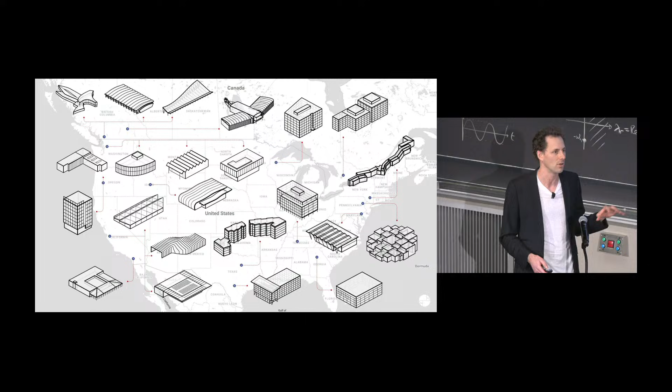Our company, we're both engineers and builders, and we work across North America and Asia on all types of structures, from long span arenas to office buildings to institutional. We cover the range of structure types. And perhaps what's most unique about our company is the number of different professions that are represented inside our organization. MIT, I learned, has such a multidisciplinary focus here, and it was inspiring. And in our company, we have almost 200 structural engineers, computational designers, carpenters, master carpenters, installers, project managers, people who can model, and software engineers.

And so today I want to talk about design and construction and why have they separated, and why we strongly believe we must bring them back together. It's not that they're entirely separated, but in many of the buildings that we build in the built environment, there is a bit of a separation which is formed.

And so going back to perhaps the first Allen lecture, this is Jörg Schlaich, and he wrote, "Care and detail, thinking and tinkering no longer pay off because labor cost outweighs material cost. So that soulless, clumsy structures are cheaper than those lovingly conceived." And isn't that true? But it's perhaps beyond just the increased cost of labor. I believe it goes to the interfaces that we have between us as designers and us as builders.

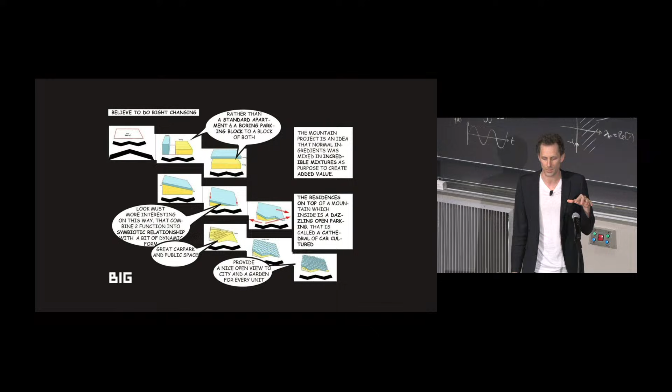And right from the start of my career, I saw how interfaces shape what we design. From Bjarke Ingels' comic book sketches, which perhaps changed even building owners' perception of why their buildings exist, to the rise of Grasshopper and parametric design, and seeing that in my early years in London, how that shaped how we could design different shaped buildings.

And as a structural engineer, of course, the interface of the software, wrestling against analysis, convergence and instabilities, and spending more time, I remember as a graduate engineer, perhaps myopically focused on the interface, the software, than on the structure I was designing.

And then seeing my father working across these structures and connecting engineers and carpenters to create incredible structures. So today I want to talk about some of these interfaces.

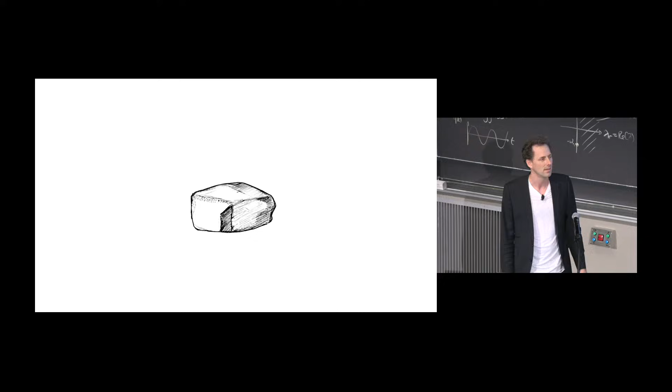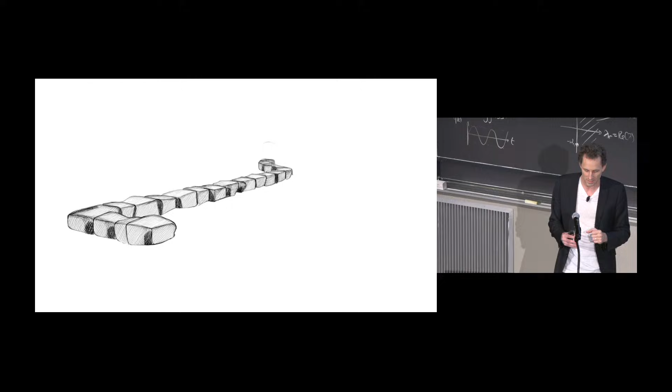So if we go back 6,000 years ago to Mesopotamia, we shaped raw earth with our hands. We created these mud bricks dried in the sun, and we built these tholoi, these monoliths, these houses that were a direct kind of human material interface. There's zero barrier between design and construction.

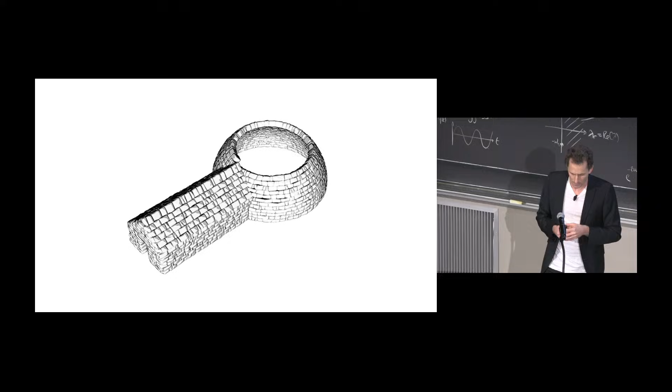And as we built these, we learned from our designs and from our construction because we lived with the consequences of our design choices. We learned by doing. We had an intimate knowledge of our building materials.

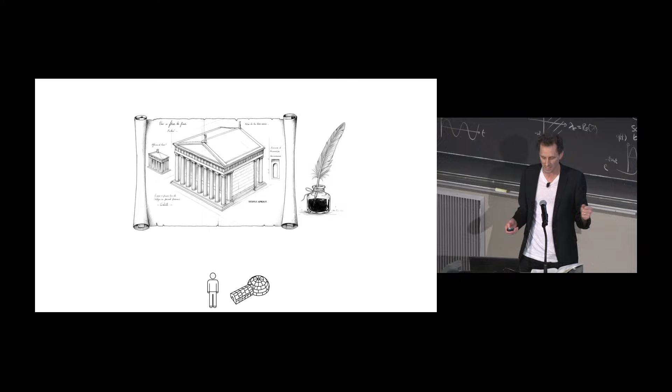The next interface that started to rise was the drawing. 5,000 years ago, we were using reed styluses to etch on clay tablets. And all of a sudden, there was this possibility that the mind conceiving was perhaps different from the mind that was creating. The Greek word architecton, which literally translates chief builder, was responsible for both design and construction. And it wasn't until the Renaissance that we saw more of a separation between the designer and the builder.

Then we had, after this interface of the drawing, this idea of a module. From the earliest cities, we started to establish ways of partitioning space into kind of repeatable geometries, modules that spread across geography and across culture. But these modules weren't just a physical object. So the Roman modular brick or the Greek column, they were, in a lot of ways, a shared understanding, which allowed construction knowledge to spread.

But once these modules were entrenched in our industry, these industry-accepted modules perhaps became more expensive and difficult to move away from. They gave us a structural design language, but in doing so, they shaped what we say.

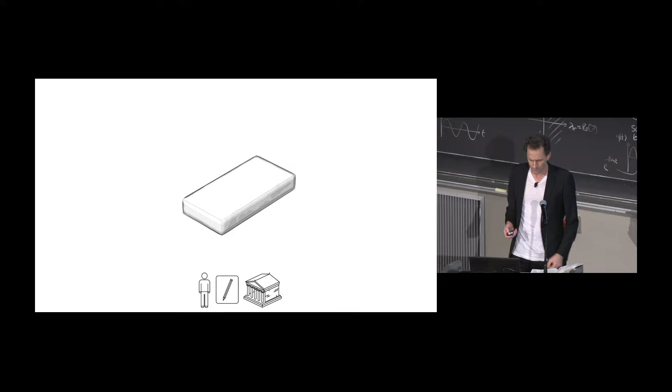The next interface, I believe, between us as structural engineers and our buildings, was really the rise of the calculation. During the Enlightenment, we applied scientific method and mathematics to construction, and now all of a sudden, we could move beyond just guild tradition to predicting material behavior. Our design knowledge became codified into building codes and standards, and this enabled safe construction across more complex structures.

But as these standards developed, they also started to become constraints. As engineers, we began perhaps designing for code compliance more than just for structural efficiency.

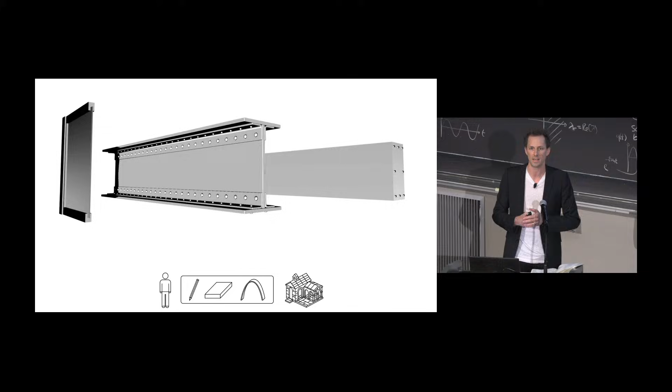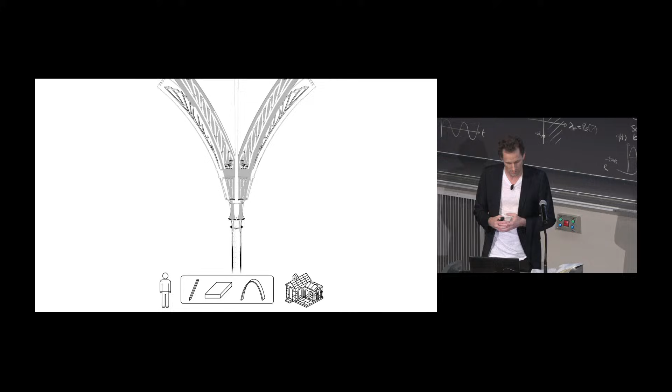The next interface was what I call the catalog. During the Industrial Revolution, there was this plethora of materials that started to hit us as a construction society. Manufacturing comes from the Latin word manufacere, which literally translates made by hand. But that became mass-produced, didn't it? As designers, there's the possibility of being limited not by what we could craft, but by the supply chain.

For some, the catalog became perhaps a boundary of imagination, and sometimes we end up navigating the market more than deeply interrogating materiality.

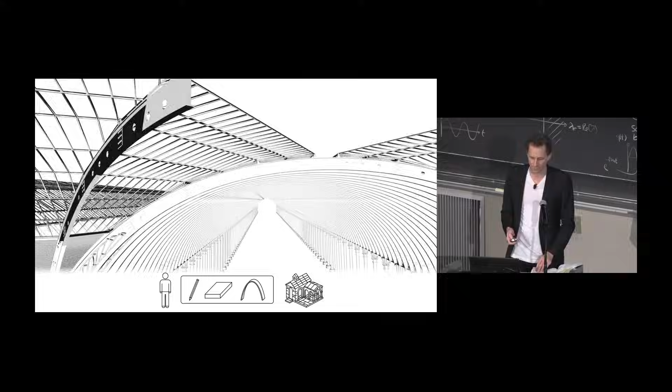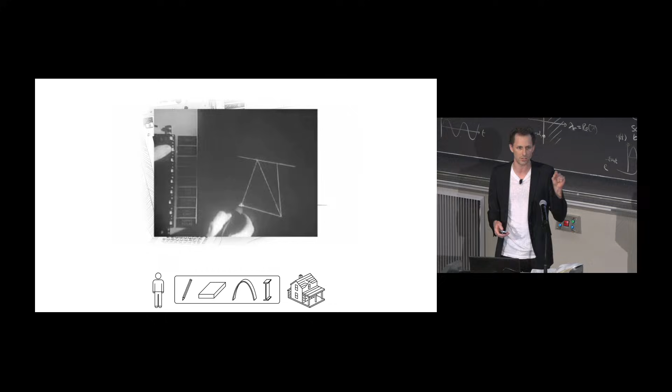The next interface that arose, in 1963 right here at MIT, was the computer. And this is Ivan Sutherland's Sketchpad, 1963, where he created the first CAD software, using a stylus to directly interface with a computer for the first time. And this computer greatly improved what we could do, from a coordination standpoint, complexity, simulation, and it was the first digital interface.

This digital interface is different than an analog interface, as you all know. So the hand-drawn line has got thickness, it's got texture, it's got an inherent ambiguity. It invites a conversation, but a digital line is mathematically precise and perfect and absolute. And perhaps we started to think that because we could model something, we could build it.

I run a sketching class for our engineers, and we put a hunk of CLT down on the table and a sheet of paper, and each person gets a pen and draws the CLT block. And then I put up a Bluebeam sketch of that same CLT block, and it's red lines, right? Every engineer would draw that CLT block in Bluebeam the same. But the sketches we get back are 40 different, highly varying, looking at grain, looking at knots, looking at cracks.

So analog versus digital. And now, of course, we face a new interface, artificial intelligence. And for the first time, our tool is not passive, it talks back.

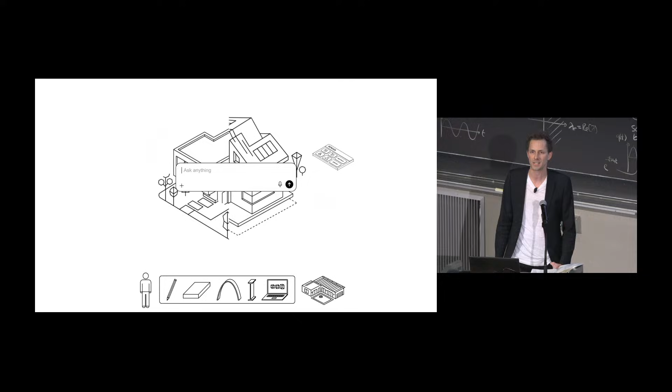We now have this vast knowledge and power at our fingertips. But with this incredible power, I believe, also comes an incredible responsibility. I think the danger is not that the machine will take over our designs, but that we may passively start to accept the optimizations without understanding the first principles that govern them. So I think these AI tools that we build as an industry over the next 10 years will have a huge impact on how future generations think about design.

So these 6 interfaces, from drawing to algorithm, they've enabled these incredible new scale, forms, and complexity in our built environment. And they've also enabled collaboration, this idea that we used to spend 10 to 20 years working on a single building, and we now spend maybe 1 to 2 years working on many buildings at once. And so these interfaces have enabled us to collaborate across disciplines and achieve more complex and more varied geometries and forms.

But we also have constructed this wall between design and construction. I call it the construction contract, right? And we lob change orders and RFIs over that wall. And so us as a practice, we ask, how do we reconnect design and manufacturing and construction? And so today I'm going to talk through a series of projects looking at using timber as a natural material and how we've used that to perhaps challenge or extend some of these interfaces.

Has anyone heard of a peeler core? Raise your hands if you have. A few. So you take a log and you chop it up with a bandsaw, right? And then you take those boards and you agglomerate them into glue laminated timber, cross laminated timber, et cetera. But actually there's another way to process a log, and this is how plywood is made. And so a log goes onto a lathe and it's peeled. And at the center of that log is a peeler core.

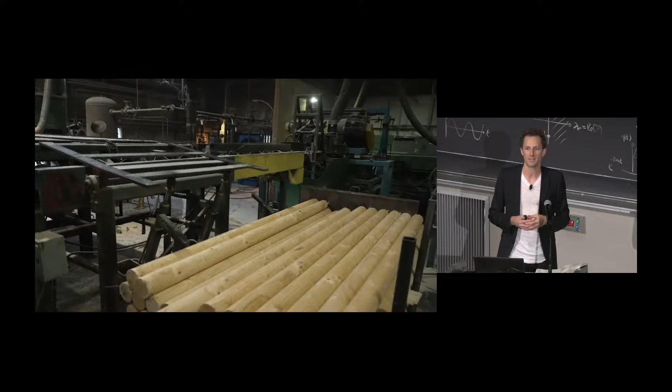And these peeler cores are produced by the billions each year by our industries worldwide. They're juvenile wood, the youngest wood in the tree. They check. They're naturally, in some ways, not very strong. And so one of our earliest projects, led by my father, was a tetrahedral space truss, conceived using these peeler cores as the structural elements.

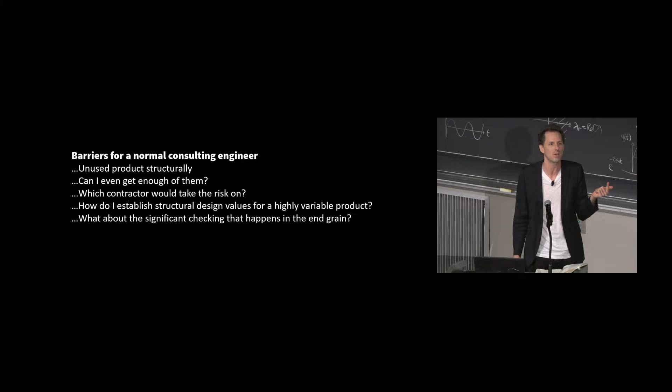And so, as a traditional engineer, we may have barriers to using a product like this. There are no accepted design values. How about this checking and the cracking that occurs? How can I get happy with the structural performance? How am I even going to buy enough of them? And this engineer-builder approach really goes and says, well, I'm going to take the responsibility. I'm going to actually deeply understand this material. I'm going to go test this material and really understand it, and then take responsibility for executing the construction.

So here you see these peeler cores with these custom engineered steel rings which have been inserted into the ends to restrain the checking. And then casting, which allows each of these peeler cores to be connected one to the other. And then these bands, different colors that actually represent different structural capacities. Space frame is a highly redundant structure, and so if there is one defect, well, it doesn't matter because you have redundancy. And so this idea of using a waste material to create a two-way spanning timber space truss.

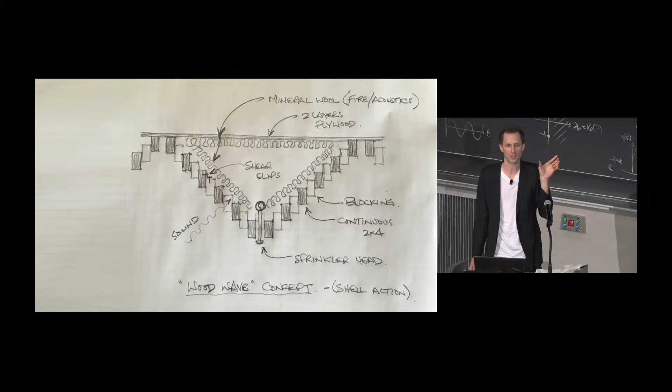The second project I want to tell you about is the speed skating oval for the Olympics in Vancouver in 2010. The humble 2x4 reimagined as a structural composite panel. And so you see these big glulam arches that are spanning about 100 meters across this oval. In between them is a series of these so-called wood wave panels. And this was my dad's first sketch of this, this idea of taking 2x4s, staggering them up and down, and then tying them with a cable at the bottom to basically force arching action through the 2x4s.

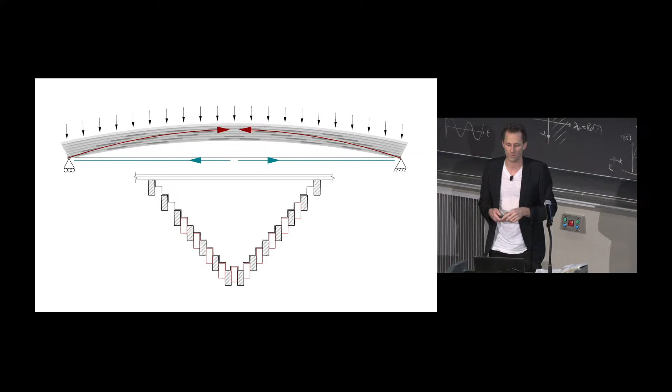So this is a 45-foot clear span. Normally, if you took a 3.5-inch thick mass timber panel, you might be able to clear span 10 or 12 feet. Here, with an effective depth of much deeper, because we're tying this arch, now all of a sudden we can clear span 45 feet, but with only 3.5 inches thick of structural material.

And so back to this connection of the engineer and the builder, here we are in our shop designing equipment and machinery for how to actually manufacture these wood wave panels, how to invent the hydraulic press that would press them into shape, how to prefabricate these strands of lumber that connect and create this arching action up to the plywood shell on top. But then, of course, how to predict the load capacity of a structure so unique. We, of course, had to load test it. So here we are in our shop conducting snap-through buckling tests of these wood wave panels.

And so creating a deep understanding of materiality and how the construction and manufacturing process impacts what we design as engineers. And some pictures of this structure during construction and this pattern of the blocking, which actually created an acoustic absorptive surface, which actually reduced the reverberation time in this giant speed skating oval.

The next project I want to talk to you about is a project in China, and I want to talk about the interface of the computer. This is a series of domes. Every single piece of timber in these 3 domes is unique. They have almost a clamshell radiating pattern. And so the computer really is the only thing that enabled us to handle the 10,000 or so unique pieces in this project. But we also had fabrication constraints.

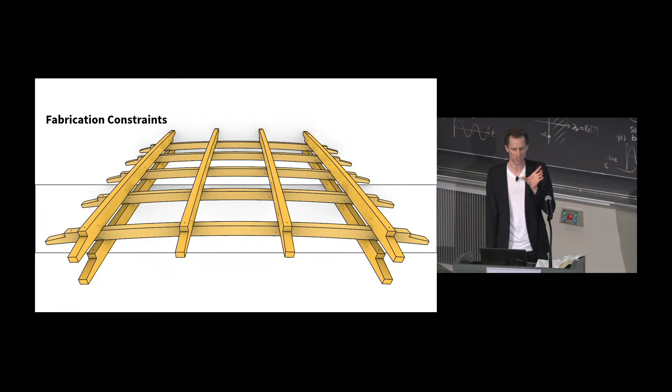And so this glulam was going from Europe to China on rail. And so we had this constraint of the shipping container. But we were also cladding it with glass. And so we had this constraint of doubly curved glass. How big of a glass piece could we get? And how does that influence our structural size?

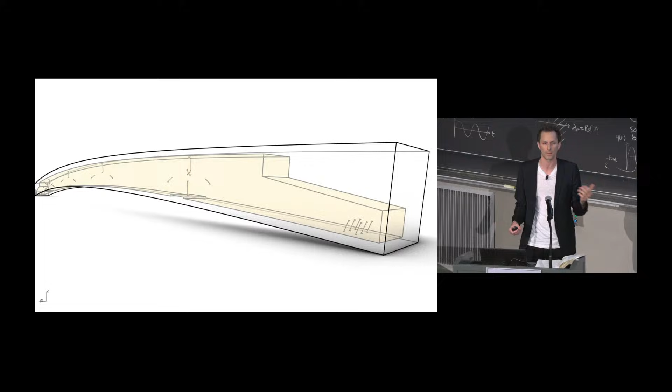And so here's a pragmatic, perhaps, way to create doubly curved glulam. We take a singly curved billet, and we actually mill out this very slight double curve to create doubly curved glulam without being limited to only one of a couple of manufacturers who can do that natively. And so here's these prefabricated panels, which are highly influenced by this shipping container in terms of their size, with joints that are influenced by how we're going to build it and how we're going to assemble the structures together.

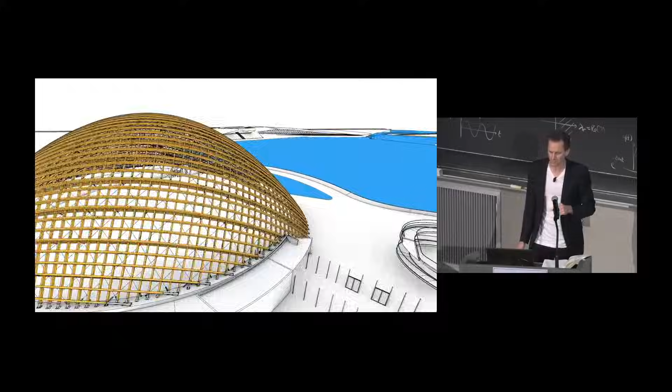These 3 domes are biodomes, so desert dome, aquatic dome, all sorts of different environments inside the domes. And the smallest 2, we were able to create this 2-way grid shell without triangulation from a structural standpoint. And in order to do that, we needed to prove the structural capacity, the torsional capacity of the joint between the 2 directions. And we actually created this joint using only screws. And so this is, again, structural testing, looking at the shear capacity and also the torsion capacity of these connections that we had designed.

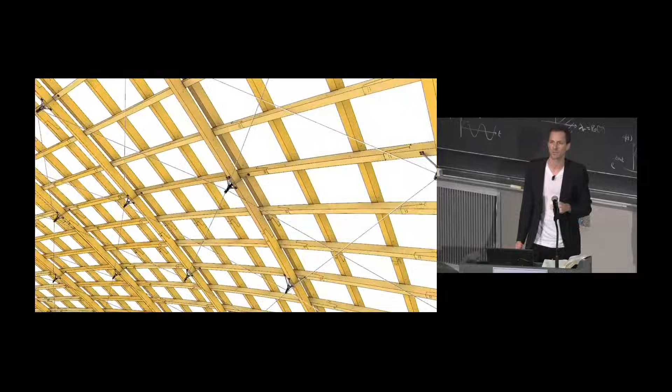But for the largest dome, we had a grid of cables to triangulate the structure. The span was too big. We couldn't restrain this kind of in-plane shear buckling. And so we had to come up with a grid of cables, constantly changing angles that the cables intersect with, and how to connect those cables back to the timber grid shell above.

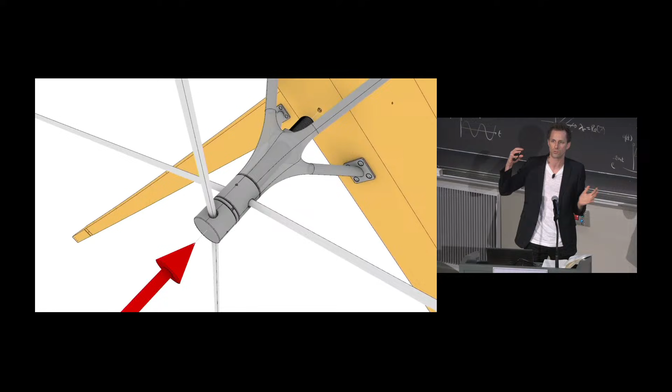And so here's this concept of rotationally decoupled castings, which thread onto a central threaded rod. And that threaded rod not only allows the cables to thread on, but it allows us to actually draw that cable system closer to the grid shell above. And so here you see these stainless steel castings.

And this was one of our first major projects in China. And as we started to talk about how to build this, I was thinking shoring towers. And the local engineer said, no, we're going to scaffold the whole thing. I thought that was bonkers. How can that be the most cost-effective way to build these domes? But as I later learned from the folks at Grimshaw, that's also how the Eden domes were built, fully scaffolded.

And no, this is not bamboo scaffolding. This is metal scaffolding. But construction approaches in China are quite different from what we might be used to here in North America. We had people riding the panels up onto the dome, if you can imagine. But here you start to see these grid shells take shape, and this kind of idea that you could create a non-triangulated grid shell only using screws, so there's no metal plates between these two directions of timber. And so when constructed, this was, I think, one of the largest clear span timber grid shells of its type in the world.

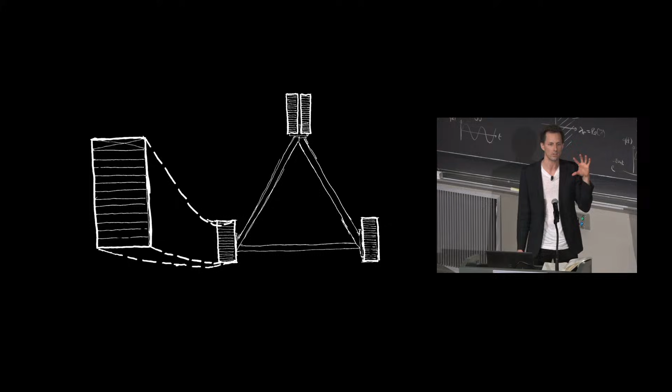So the next project I want to talk through talks a little bit about the interface of the calculation. This is a project where we're using glulam, but we're using it as a hybrid with steel to create a triangular truss. So we have a double top chord and then two glulam bottom chords connected with steel webbing. This is in Tianfu in China, and this is about a 750,000 square foot project. And these vaults clear span up to 400 feet and are up to 150 foot tall. So as tall as a 12-story building at their tallest.

And here, if you think of a vault, of course, compression structure, catenary shapes, as we looked at earlier, are the most efficient way to do it. But timber alone for an arch of this span would be a challenge. And so we're starting to think about hybridizing and creating structural depth again with steel trussing.

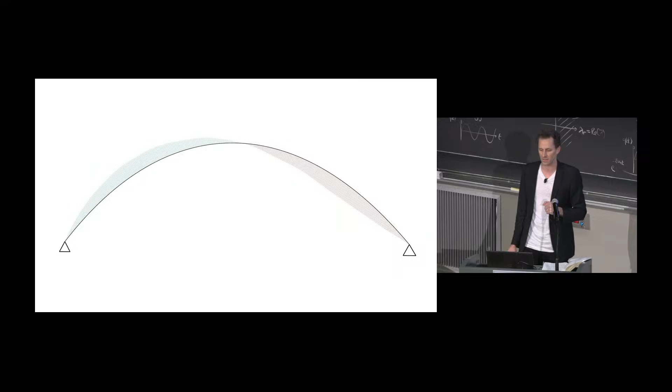And looking at the analysis of a pin-based arch versus a fixed base arch, we start to realize that if you fix the bases, you get a natural kind of hinge point at the mid-span. And that allows us to start shaping that truss from deep at the perimeter to shallower at the center.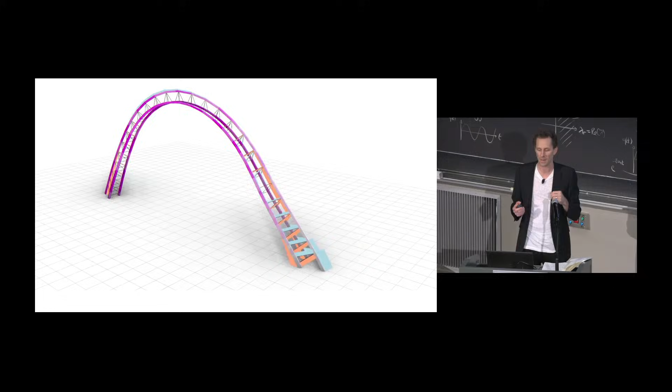But it also informs some of the thinking around how we connect the top and bottom chords, this idea of almost a Vierendeel connection. And so the trussing in this truss doesn't node out, which it should, of course, because the trussing should node out, otherwise you get bending moments and shears in that bottom chord. But here what we're doing is, by not making the steel node out, we've actually created a way of splicing and prefabricating this truss.

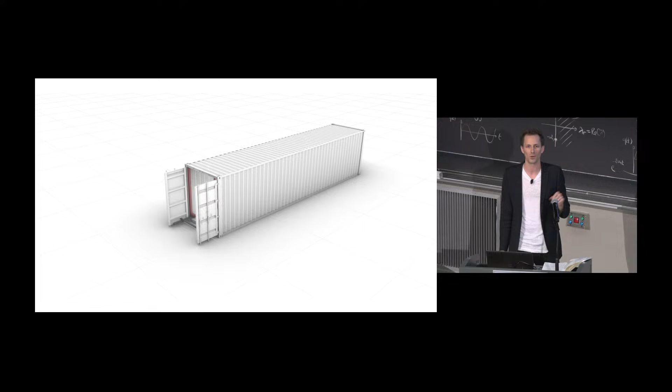This entire project was built during COVID. We were only able to get one person into China. It was on lockdown. And so we had to create almost an instruction set to instruct the local crews how to actually build this structure when we couldn't have the normal crews we would have there to help guide the whole process.

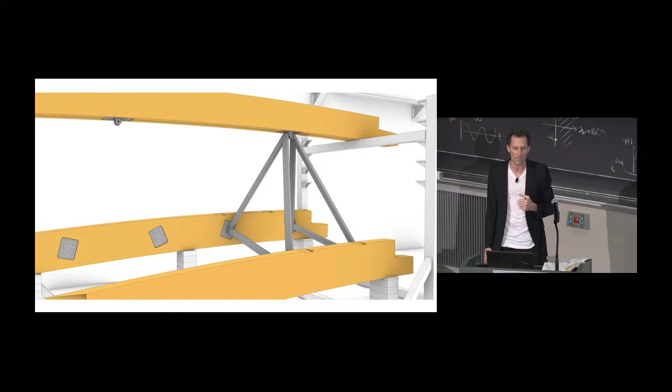And so here you see almost this 3D IKEA set diagram connecting the top and bottom chords into these sub-assemblies, which are done off-site, which then get craned onto the job site and connected into larger lift assemblies. These lift assemblies then get craned up onto shoring towers, so I finally got to use my shoring towers. And we built them over top of steel and concrete structures that were being built underneath the arches at the same time. And so the installation technique actually greatly informed the structural system.

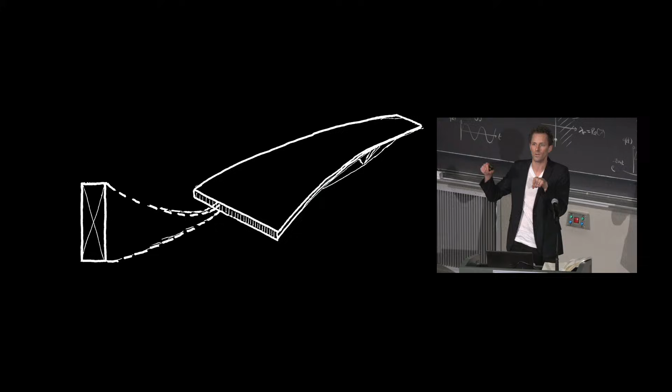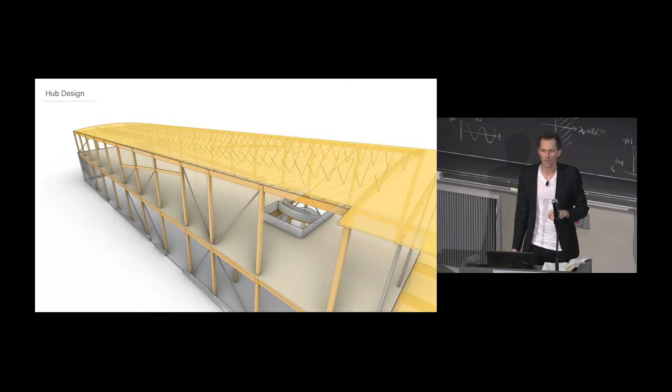So the next project I want to talk to you about is, again, looking at the use of the 2x4 as a structural material, but instead of staggering it up and down, here we're making a flat mass timber panel, and we're actually curving it. So this is for an aerospace museum in British Columbia, where I'm from. The roof of this aerospace museum is about a 60-foot clear span. And this concept, again using trussing, is taking a flat panel, curving it, and then using that curve to create structural depth because we're post-tensioning it against a cable below.

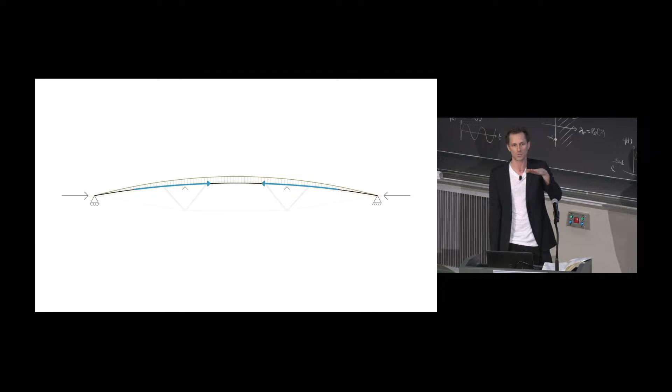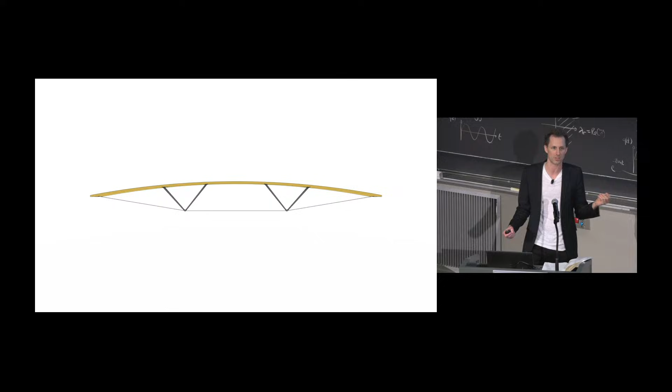But when we curve that panel, of course, we're locking in stress into the timber panel. And so that could be of concern because we're actually putting a lot of stress into this timber panel. It's actually close to breaking when you do the calcs. But timber is a very interesting material. It creeps, and it actually gives way and yields over time. And so those stresses that may have existed initially eventually dissipate over time.

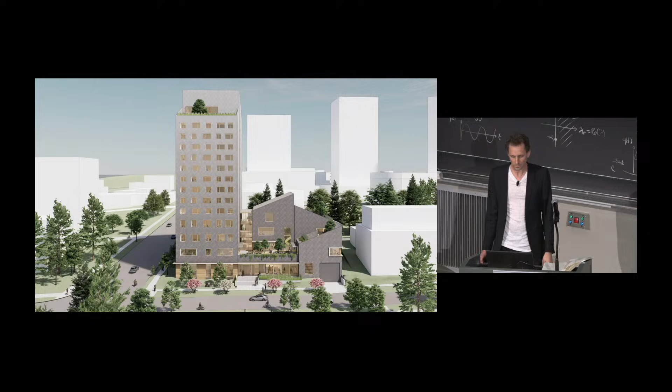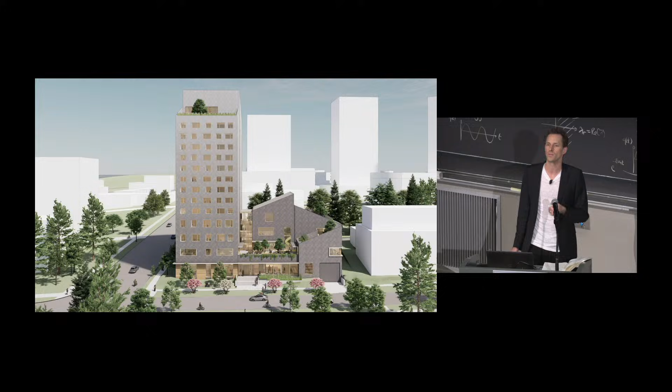This project with Michael Green, if built, will be the tallest all-wood building in a seismic zone, worldwide as far as we know. And so this is in Vancouver. And this is really challenging the interface of the calculation. As engineers in a seismic zone, we have pre-approved systems: concrete shear walls, steel brace frames, or BRBs, right? But if we want to use wood, there's no real pre-approved system for how to get to a 12-story tower in a high seismic zone.

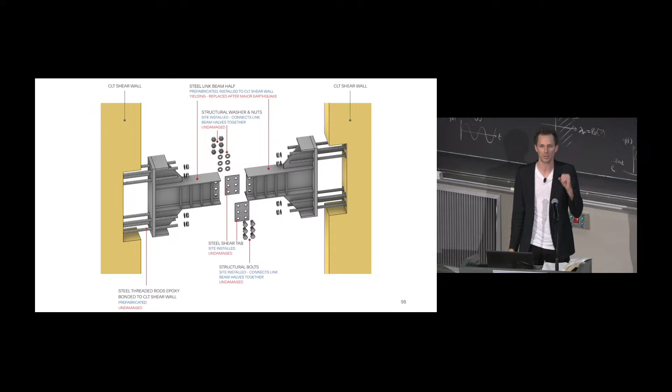And so this is working with some of our engineers who did their PhD at the University of Canterbury in New Zealand, and looking at creating steel link beams that connect CLT shear walls to actually yield and create a fuse in an earthquake. And so these are replaceable steel components. This is some of the testing that happened at the University of Canterbury, and we are actually just in the process of repeating it at Oregon State University, where we're looking at how these coupled CLT shear walls can create energy dissipation and this kind of ductile hinge, almost like bending a paper clip back and forth during an earthquake.

And next, this interface I want to talk about is really the physical model. So it's kind of a subset of how we calculate as engineers doing physical modeling. This is a timber grid shell in Atlanta; this is actually for the FIFA World Cup viewings. And so we're in active design and construction on this right now.

And this Pringle shape, of course, has been done many different times in quite a few different materials. But here we're perhaps doing it maybe for the first time all out of timber. So it's a doubly curved glulam ring beam, and then a bending active grid shell, which is draped onto this ring beam. But as we're starting to think about the geometry for this structure, what surface should we choose?

We could obviously define this surface in many different ways, as a hypar, as a catenoid, or, as actually Chris Williams pointed out to us, as a surface of constant negative Gaussian curvature, which has a very interesting geometric property that you can form Chebyshev nets that actually basically are deployable. And we can do that without really doing anything other than minor axis bending and torsion in our timber elements. We don't want to put major axis bending into these grid shell elements.

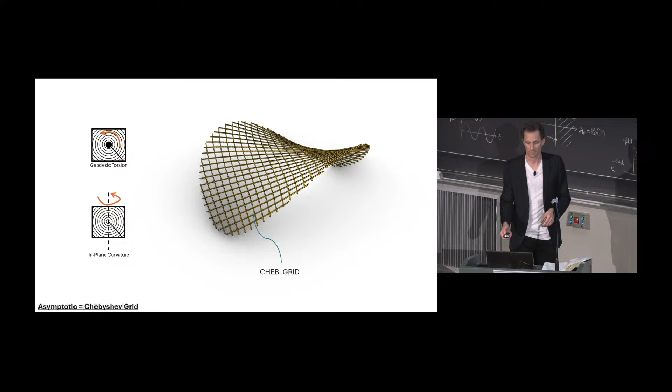One second. Frozen. Sorry about that. Okay, here we go.

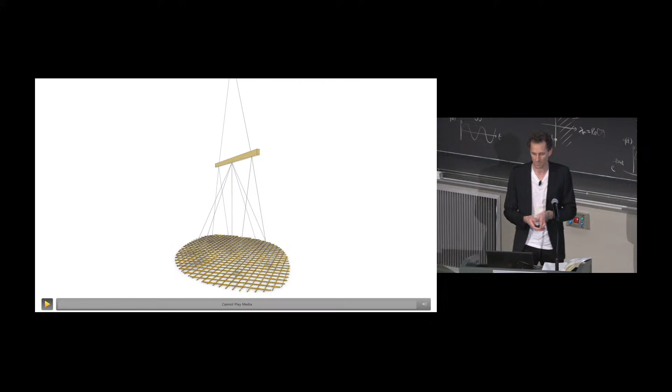Hopefully we're back. So this idea that this grid shell could actually be built from flat, and starting to simulate what that might look like. And so if we lift it from certain lifting points on a crane, that's not working, but what shape will it take, and will that shape be a close approximation to the ring beam that we have around it?

And actually, just yesterday, this is hot off the press, we just finished a 1:10 scale model of this grid shell. And so we're literally simulating exactly how we're going to lift this grid shell from the ground into place, and starting to understand at a much deeper level of materiality how some of these connections we're coming up with to connect the grid shell elements to the perimeter ring beam might affect how we're going to actually build it out on site.

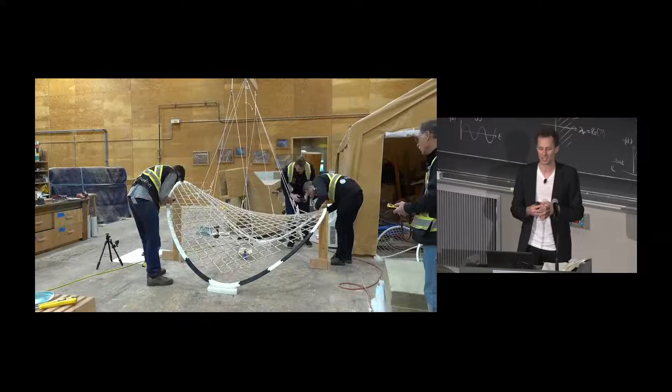Because as you can imagine, this is somewhat cost effective to do in a shop, but you go out on site and this thing is hanging on a big crane. You do not want that thing hanging overnight, right? You've got to do this in one day, and you get one shot. And so simulating it and doing physical modeling to really understand how it's going to perform is incredibly important.

On this project, we also had the opportunity to compare CFD and wind tunnels, something that I'd worked on in London 15 years ago. And I wanted to see how the state of the art has advanced. Can we now replace the wind tunnel with CFD? And here we're working with a company called Aerosim, and we're conducting a very detailed CFD analysis, detailed enough to actually get the structural pressures out of.

And so an incredibly accurate simulation, but as you can see, as the vortices shed off of the leading edge of this structure, the key question is when does the wind reattach itself to the structure after it's been lifted off?

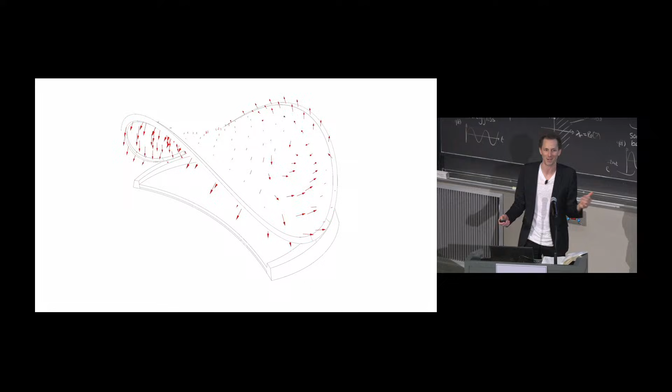And so going into the wind tunnel, measuring all the pressure coefficients, and then remapping and comparing the wind tunnel with the CFD, what we realized is overall the total net forces on the structure were actually quite similar. But the way they were distributed was slightly different. And that phenomenon of how the vortex shedding works in detail was just different enough that it significantly changed the forces and results between the wind tunnel and the CFD. So we used the wind tunnel results at the end of the day to design the structure.

And now I want to talk about something that we've been investigating as a practice for the last few years, really actually since the start of our practice, is timber joinery. If you think about timber structures as old structures, we didn't used to have metal plates or epoxy rods or screws to connect them, did we?

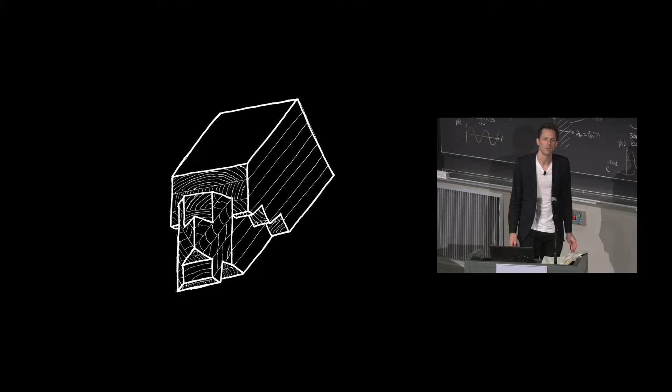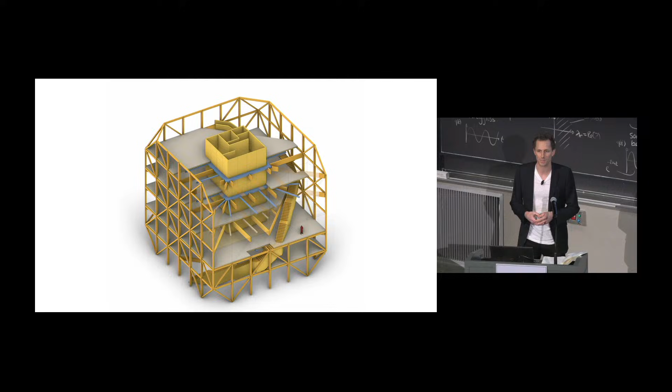So this is a project at the University of Kansas with Bjarke Ingels' group. And this is the new School of Architecture and Design. It's a building that's meant to house a teaching environment for students for generations to come. And BIG posed this as a teaching tool itself. This building is a teaching tool. So how do we turn this building structure into a teaching tool?

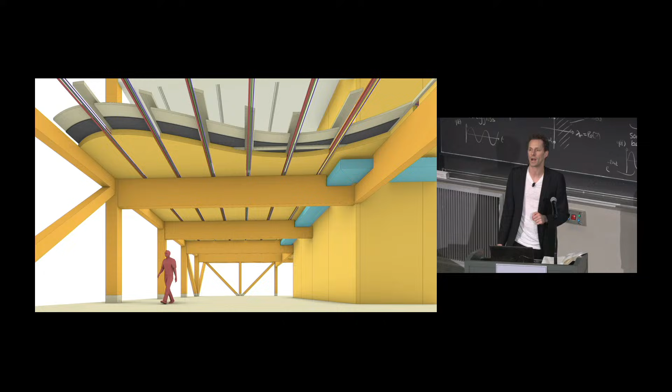We have the systems on display. We're not using any drywall in the structure. We're actually replacing rock wool in the external skin with hemp insulation. And so turning to the structure, what do we do with the structure? How do we make this timber structure something that inspires students of the future? And so here we're starting to look at different kinds of joint topologies.

And I was on a call with Bjarke, and he challenged me. I asked him, what do you want for the joints? And he said, no, what do you want for the joints? And so I had to start thinking, what do I want to do for these joints? So I started sketching all of the steel plates and hardware that would normally be in a joint like this, and suddenly thought, what if we could go back to how we used to connect timber, just wood to wood?

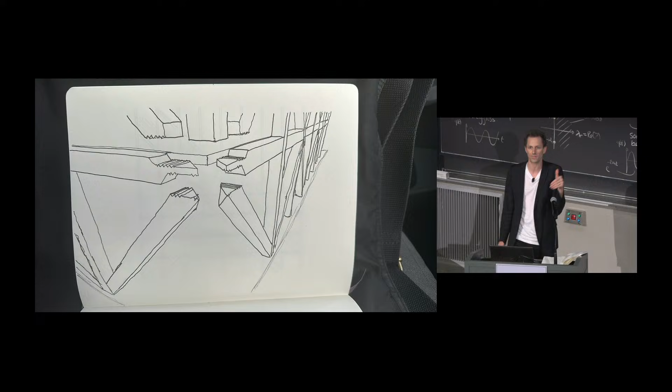And so this is kind of a first sketch of using geometry to actually inform how the structural forces flow in this diagrid. And because we have a workshop, a few weeks later we're down there with some of our master carpenters prototyping this joint and starting to see, could our ideas work? Could we use the geometry of how we mill these timber pieces to actually lock them together, hold them in place, and transfer structural loads?

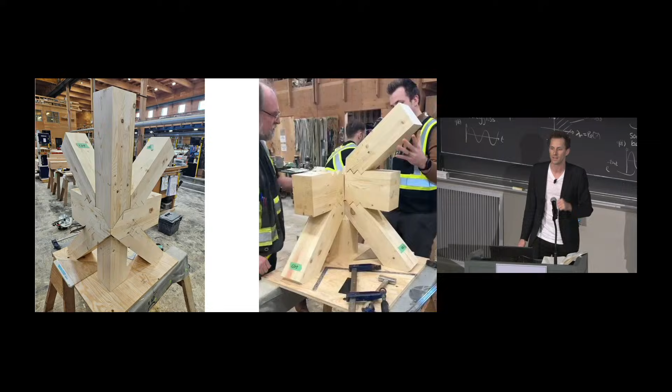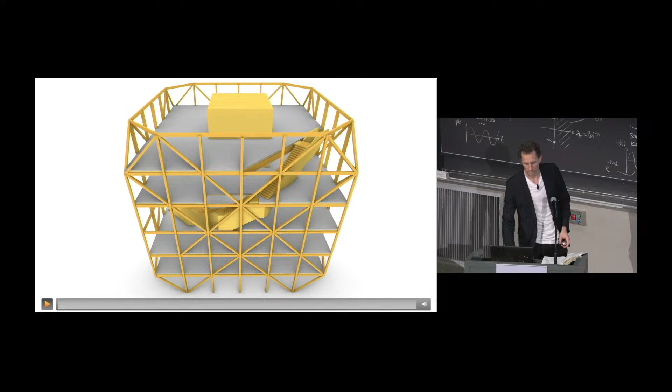And obviously, this is something that perhaps hasn't been done before on this scale. Oops. Some of these videos are not working. My apologies. Well, we'll just keep moving.

Hasn't been done before on this scale. And so we're thinking, how do we actually prove this out? So we decided to make a full-scale mock-up of one corner of this building. But first we had to decide what this diagrid was going to be anyway. So here we're looking at which diagonals should we keep, which should we drop? Do we do some topology optimization or follow the principal stress lines? But we landed on: perhaps the simplest is the best.

Actually, the CNC machine only did a part of this, and the finishing was done by hand by master carpenters. And we actually calculated it was going to be cheaper to do it by hand, because it would take less time than running it on the machine to get every joint perfectly square. And so the art of craftsmanship is not lost.

It appears that all my videos may now be not working, which may be a problem. We'll see.

So moving on to another project where we're using mass plywood, MPP, mass plywood panels, which are basically cross-laminated plywood, or basically LVL. This is for a project in Barbados, the new National Performing Arts Center with Adjaye Associates.

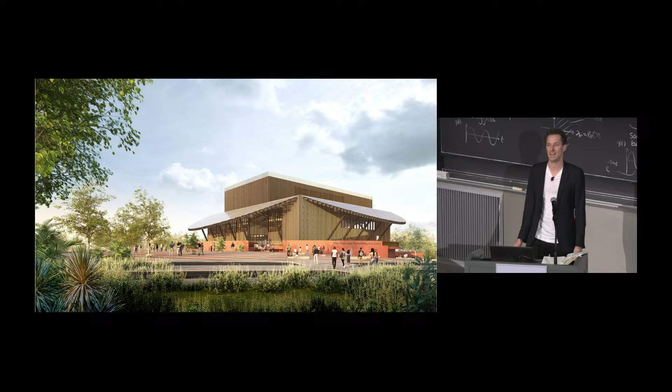And we got given somewhat of an incredible task. We got asked in January of this year, could we build the structure and have it complete by August? And we hadn't even started design. I mean, no, right? It's impossible.

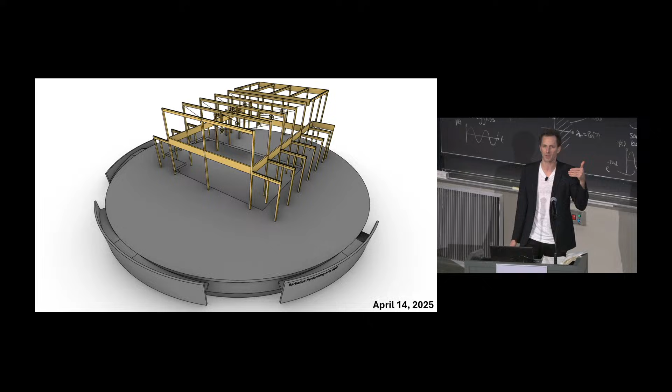But working with the architect and the owner, we started to peel back the structure to kind of the bare bones. And we started to realize that, hey, maybe if we turn this into a temporary part 1 or phase 1, we could actually build it in that short amount of time. And part of the structure is, of course, it's a big auditorium, but we have a performing arts center with a stage, and over that stage is a giant truss. And so this truss had to be about 23, 25 feet deep to conceal all the equipment behind it.

So we started to ask ourselves, well, could we use this truss as a way to actually explore joinery? We had a very limited amount of time to procure materials, so actually if we could do all of the fabrication in-house and not have to procure steel from a steel shop, that would reduce time. And so here we are sketching connection ideas with our carpenters and starting to look at what truss typologies might be the right truss typologies.

And so, perhaps the most obvious one would be to put 2 big beams and connect them with verticals, or just do a Howe truss, but then you end up with tension. And how do you take tension in an all-wood joint? That's quite a challenge. And so we ended up with this kind of arch where we're almost trying to transfer most of the loads in compression.

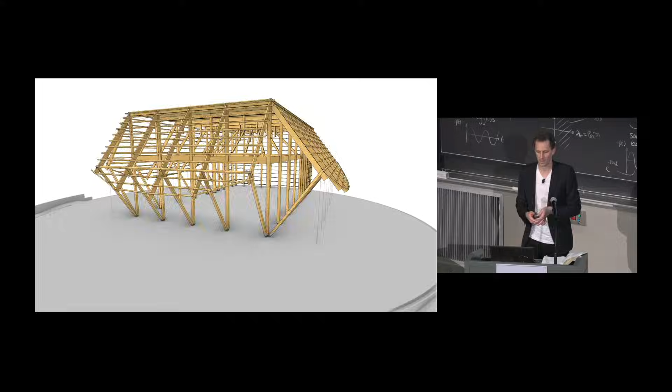And so this truss that kind of emerged is somewhat of a structural optimization problem. What is the optimal arrangement of these diagonals? And how do the bending forces and the axial forces change as we change the distribution or the angles of these trussing elements? But it's also a manufacturing and a connection detailing problem.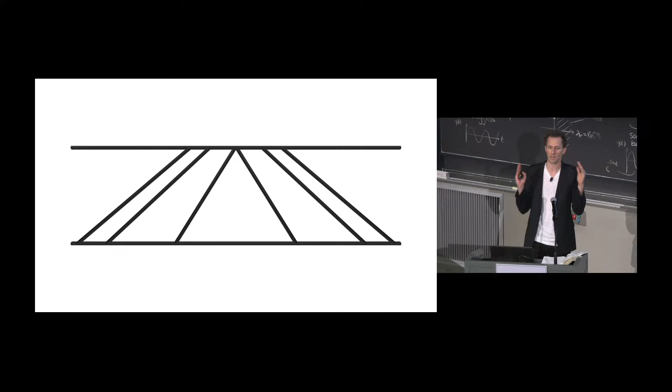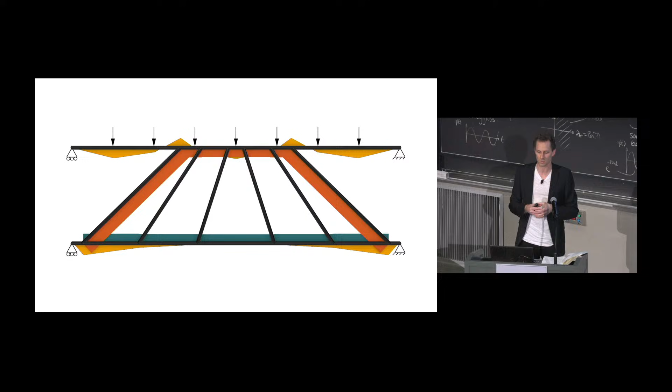If we do a pure genetic algorithm approach to determine what the structural optimal solution is, we will get a geometry. The question, of course, is that geometry buildable? And so the geometry that resulted from the optimization had splice joints in the wrong spot. It had connections too close to the ends of some of our elements. And so what we ended up doing was we actually changed the geometry to respect the manufacturing and construction constraints. And those central pieces, this is a hurricane region, so we actually have net uplift on this truss. So the central 4 pieces are actually acting like a mini truss when we have load reversal.

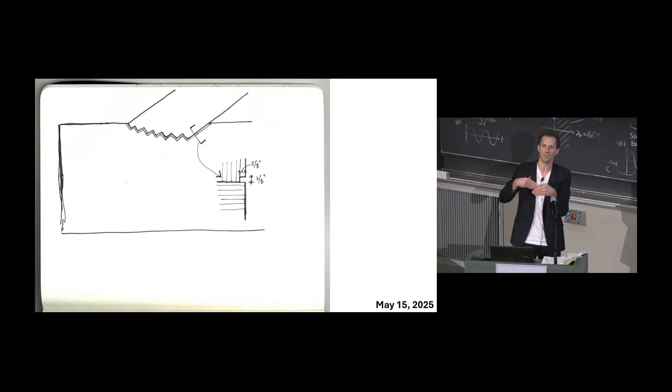So as we're starting to look at connection typologies for these all-wood joints, of course inspired by some of the Japanese joinery of millennia ago. This is the Okkake Daisen Tsugi joint, and then also starting to invent some of our own connection types, these kind of mass plywood tenons, or these kind of notched compression joints. This particular joint transfers up to 230,000 pounds of compression from this brace down into the bottom chord of the truss.

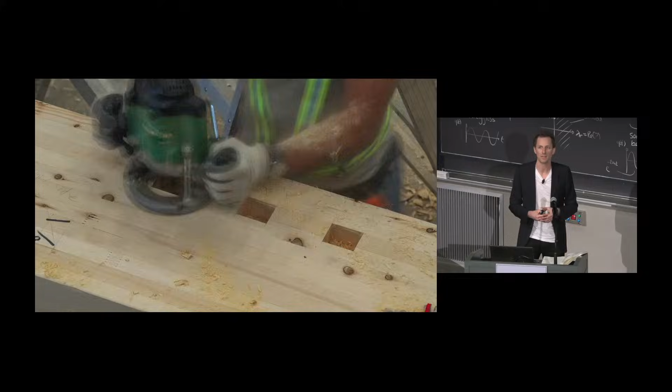And then about 4 weeks later, maybe 6 weeks later, after designing this truss, we're down in our shop actually manufacturing the truss, test fitting it, chiseling it, working with the raw material and shaping it by hand, a lot of it. This entire truss was manufactured in the space of around 2 weeks, which is kind of an incredible achievement. It won't fit. We used amaranth, which is a purple heartwood, for some of the dowel joinery. And here you see our whole shop crew gathered inside the truss.

And then the next challenge for us is, okay, we can design it, we can manufacture it. How do we ship it to Barbados from Vancouver, Canada? And how are we going to get it there in time? We were going to fly it in 2 747 cargo jets. That was our original plan, because that's literally all the time we had. And then we realized that Bridgetown Airport cannot unload a 747 cargo jet. They don't have scissor lifts tall enough to kind of yank the stuff out of the plane.

Here you see some of the process of rebuilding that truss out on the job site. And this is a complicated piece of joinery. And so one of the things that really helped was our incredible craftsmen who were part of building the truss the first time in our shop; some of those same people went out to our job site in Barbados and helped put that truss together a second time. Of course, some editing required, moisture content changes, humidity, wood swells as it gets wet, but actually, all in all, it fit incredibly well.

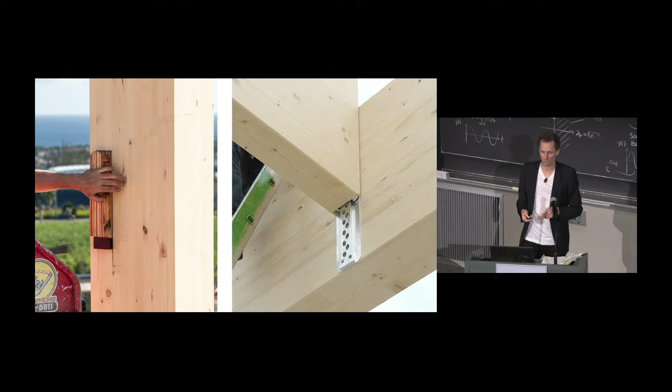And so here you see it, an all-wood truss spanning the first national stage for Barbados. And maybe one of the most incredible things is we did finish it on time. So I'll show you the time lapse. But this was another interesting use of wood joinery.

In modern mass timber construction, we like to use these pre-engineered metal hangers, Ricon or MEGANT type connections. And so on the left-hand side, you see what we created, which was this MPP kind of dovetail tenon, which actually allows us to do the same thing, but using wood instead of metal. And so here you see that flying into place, or not, if the video doesn't work.

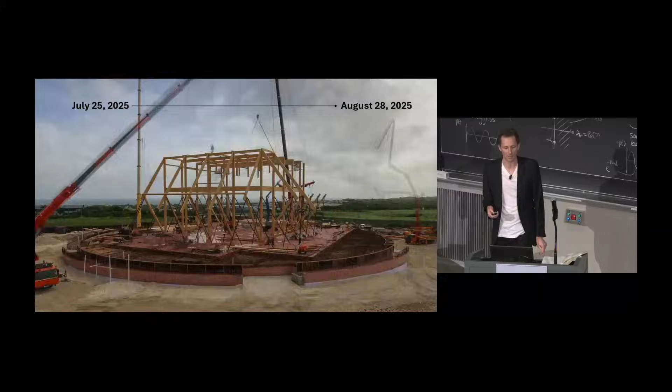And here you see kind of a time lapse of this structure being built. The entire timber superstructure was built in the space of just about 5 weeks, which is an incredible achievement and a testament to a lot of very committed people.

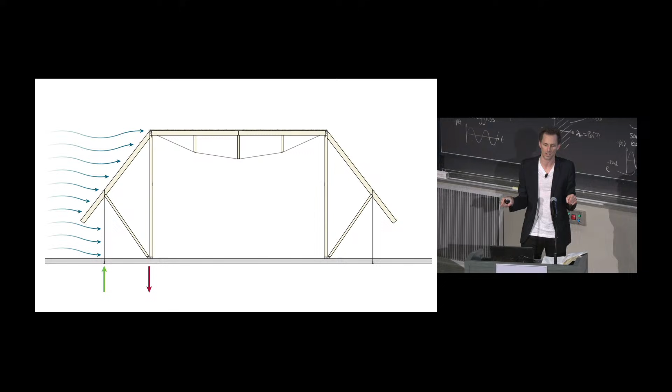And so that's some thoughts around how we might shape timber joinery. And to close off this lecture, I want to talk about software and this new AI interface I talked about earlier. Branch is a piece of software that we've been starting to work on internally over the last 3 years. We measured our digital footprint, and we have so many different pieces of software in use to go all the way from design to construction. I think more than 30.

And so all these different packages, there's information barriers, you guys all know, right? It's hard to get data in and out of different softwares. And so we started just by thinking about, well, hey, could we actually replace the detailing tool we used? And so this is Branch Detailing, which runs on top of Rhino, this particular version, and allowed us to go all the way from detailing and modeling through to creating the CNC files and the G-code for all these mass timber projects and steel projects.

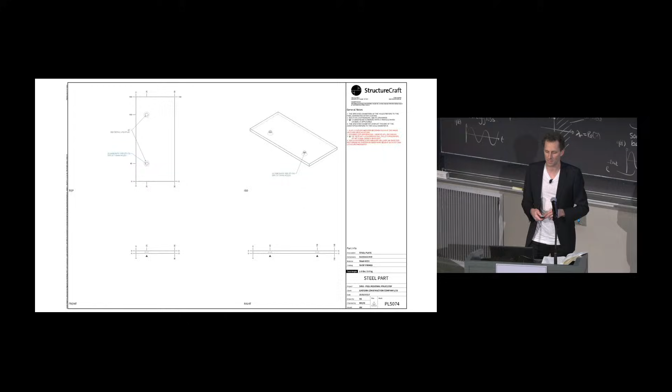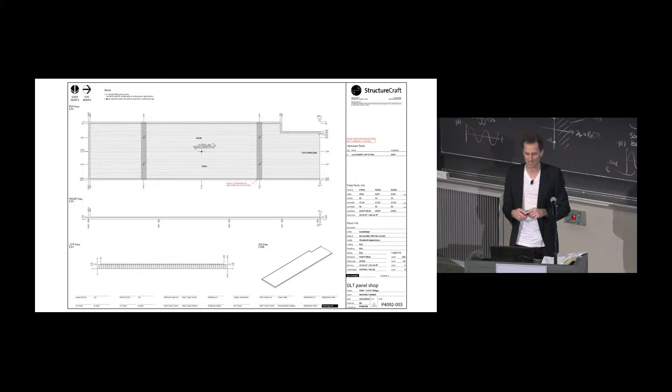And over the last 3 years, Branch has pumped out almost 2 million square feet of built projects. And this is just a sampling of all the shop drawings that have been created out of Branch. So all sorts of different types and shapes and sizes and everything from timber to steel to cross-laminated timber, the glulam. These are some of the shop drawings from the project in Barbados that we just looked at.

But now we've started looking at what about a vertically integrated platform that allows us to go from conceptual design into detailing all the way from the start to the finish. And so what you're seeing here is a conceptual design platform. This is actually freely available. Anyone who wants to use this can. It's on the web. If you go to branch3d.com, you can go just try it out.

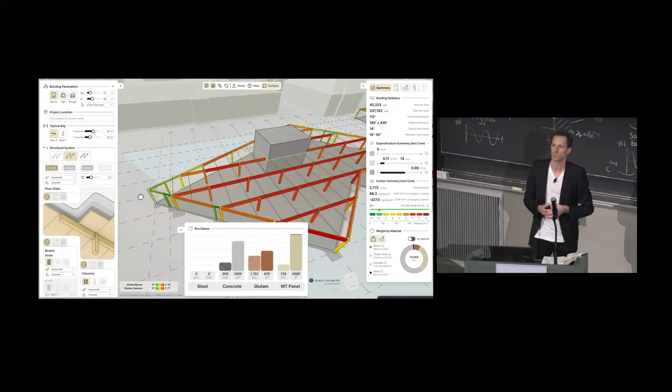And you can go push and pull on your structure and see how your material efficiency changes or how your carbon changes. And you have almost a smart structural framing algorithm, which allows you to explore different building massings and column grids and densities more rapidly than you may have been able to in the past. And so this has actually got a real-time analysis algorithm working behind it.

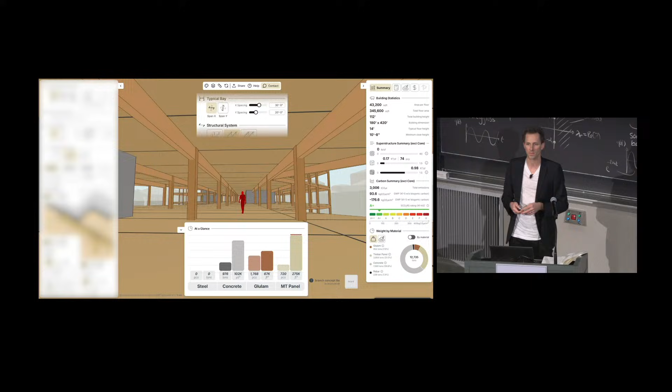And so one of the goals is on every project like this that we investigate, we have to compare materials. We have to compare timber and steel and concrete, and we have to compare material efficiency, carbon, all these things. And so this allows us to start exploring those more rapidly. And it also gives us a deep insight into the product landscape, so all the different mass timber manufacturers and CLT panel widths and all that kind of thing. But now we're starting to think about, well, how should AI influence the software we design?

I think AI is an incredibly powerful tool. It needs to act on our behalf, not act for us. And so it needs to be something that we remain in entire control of. And so one of the things that we've been thinking about is, can we deploy AI as a toolsmith rather than as something that is doing our job for us? Can it be something that helps us create tools much more rapidly than we used to in the past?

And so we've seen this kind of progression of artificial intelligence from classic rule-based through to foundation models. And each of them have incredible value for us and some limitations. And when I talk to my structural engineers about AI, they're like, I can't trust AI. It's probabilistic, it's not deterministic. How am I going to be able to trust the result? And of course, with some of the reasoning models, we've seen big advances. But I think one of the things that we need to start doing as an industry is start creating foundation models that can reason about deterministically correct things.

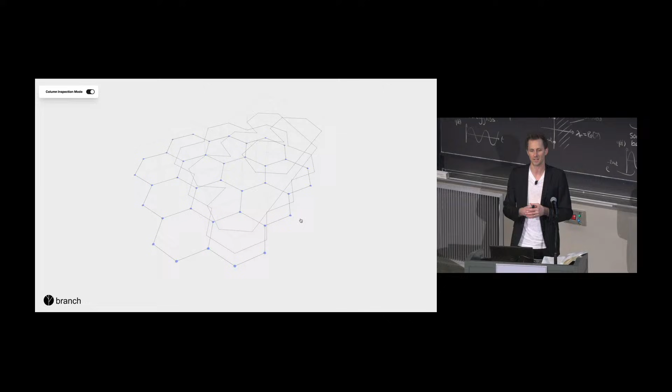And so this is just a little prototype, which is now not going to work. There we go. So imagine you have a structure like this, and you're trying to understand how the structural system works, how the forces flow. And imagine what chatting with your model could look like, not to design your structure for you, but to create interfaces that change how you interface with your structure. And so I think this is perhaps the next foray that we need to do as an industry: start investigating how our tools can become smarter, can become truly computer-aided design tools, and give us a smarter way of interfacing with our models, because we do now have an incredible power at our fingertips.

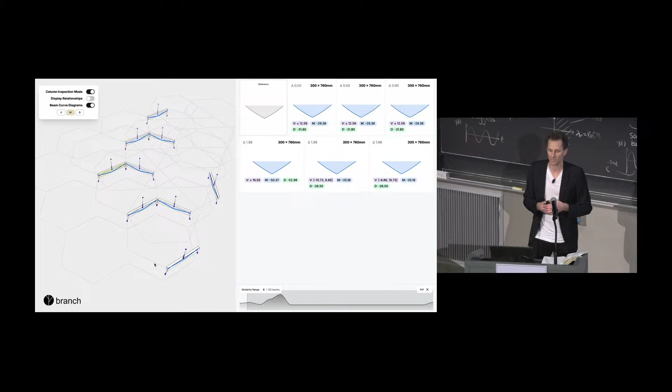This is the concept of exploring similarity of bending moment or shear curves across a building, and plotting statistical distribution of those across your structure, and then being able to interface and filter your structure down to the beams or the structural elements which are the most similar to the one that you may be currently designing. And so for those software engineers in the room, in blue we have pieces of code that we know are correct. As structural engineers, we can independently verify it's doing the right thing. But AI now starts to reason around these verifiably correct things and construct them in ways and patterns and at speeds that we as humans never could have in the past.